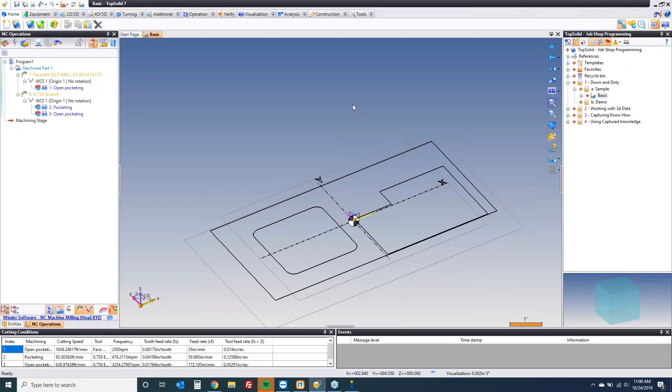If I go into my project here, our first sample here is called Down and Dirty. I'm going to open it up and just show you what I'm talking about. So here I have a couple of basic profiles created. I have a rectangle where I'm machining off the face. I have pocketing operation 1, open pocketing operation 2. Quite simple. What I'm going to do is show you how you get there.

That's the important part. One of the things I really like to do when I'm showing TopSolid is I don't want to hide anything from people during demonstrations. I want to show you click by click how we do it. And then you can be the judge. You can decide whether or not this is more efficient than what you're doing now.

So here's how we're going to start. I'm going to go to my demo folder here for Down and Dirty. I'm going to right click on it and I'm going to choose to make a machining document. When I do that, the software is going to ask me what template do I want to use, and we're going to get into some of these more advanced templates later on in the presentation. But for now, we're going to just work with a basic mill, because again, at the end of the day, the goal of this is fast. It's going to ask me what to name it here, so we're going to call this plate. Why not?

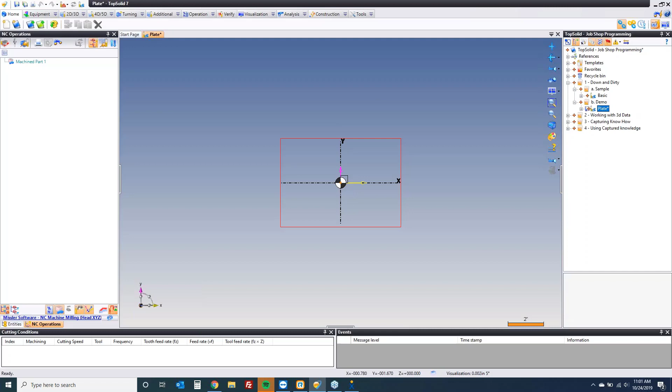So right off the bat, you see a plane, you see some axes that represent the machine axes, and you see where our G54 is. Our G54 is right here in the center. Now we can draw about that, and that'll be fine, or we can draw whatever we need to draw and move our G54 to where we need it to be. Choice is yours. For this sample, I'm just going to draw about my G54, so I'm going to go ahead and go to Cad Mode.

In Cad Mode, I can either right-click and start a sketch, I can go to my 2D Sketch tab up here, hit my pencil to start a sketch, or go directly to the command that I want to use to start the sketch. Again, choice is yours. Here, I know that I want to create, for example, an 8-inch by 4-inch rectangle. Now, if you look at my rectangle, it's following my cursor around the screen based on the center point, which is convenient because I want that centered about 0, 0. Perfect. So I now have the boundary of the plate that I'm machining.

Next, I want to create another sketch. In this case, it's going to be another rectangle, and I want this rectangle to be 2.5 inches by 2.5 inches, again, by the center. And I'm going to pop it right on my x-axis there. This way, we know where its location is up and down. And now I'm going to add a quick dimension from here to here because the guy that I'm building this for said that's a 1/2 inch from my 0.

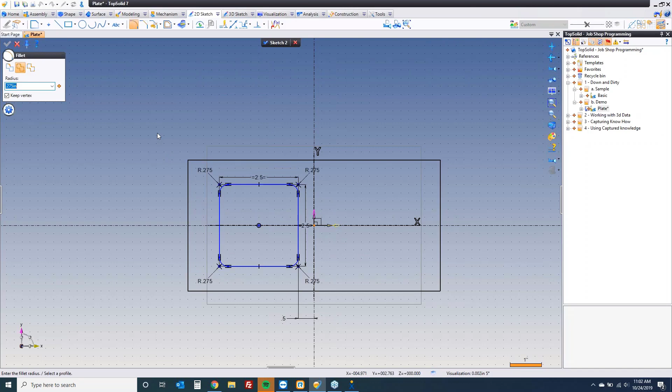Last thing I'm going to do, I'm going to add some quick fillets in here, maybe 275, whatever. You get the idea. I have my geometry. Now, at this point, we have enough. Let's go ahead and start building some toolpath. So now, when I switch back to TopSolid Cam, just to illustrate again, this is just flat 2D dumb geometry.

There's no intelligence here. So, to begin with, I'm going to simply select what I want to machine, right-click and go to End Milling. Or, again, if you're new to the TopSolid interface and you don't like right-click menus, you can go to the 2D, 3D tab and click End Milling right there.

For those of you that don't know, End Milling is a combination of facing, pocketing, and open pocketing. It's all in one command. It works on profiles, it works on solids. You'll see it works pretty much across the board everywhere. It's wonderful. Now here, the software chose for me my face mill. It's the first operation, kind of makes sense, so it's grabbing my face mill.

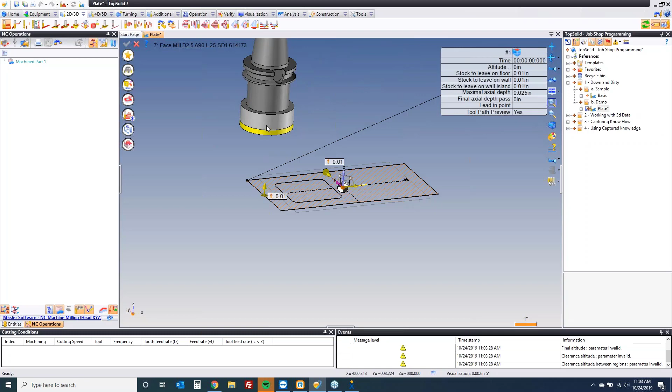Now, what you don't know is the template that I chose, that basic mill. I have my favorite tools already loaded in the carousel, and we'll get to that in a second too. So right off the bat, it found the area to machine, but we have a problem. Notice here there's an asterisk, and if you hover on it, it's telling you the starting altitude has got a problem, the final altitude, the rapid planes, because it's just 2D curves. The software cannot make intelligent decisions here, not with data like this.

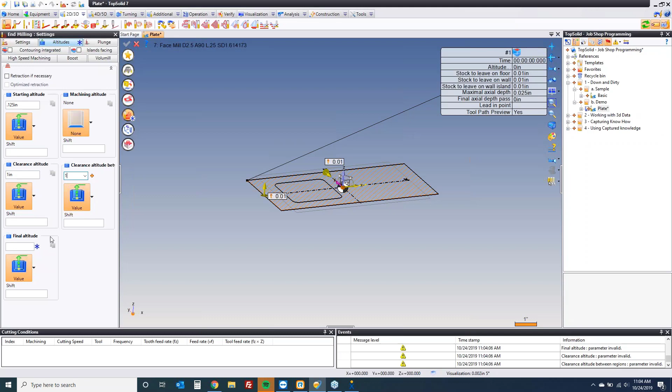So here, if I say my starting altitude is going to be an 1/8 inch above 0, maybe in my mind I know I have an 1/8 inch of material to remove, right? And then if I go down here to my rapid planes, I want a rapid, not at 21 inches, at 1 inch. Clearance altitude between regions is 1 inch, and final altitude is 1 inch.

Now I have toolpath. Now here, because TopSolid really is intended to work off 3D models, I'm also going to go turn off a default command called ZPath stock fitting, which we're going to come back and talk about in a little bit. And now I want to treat this as a facing. Remember I said they're all in there. You can just choose what you want. And now we have our facing.

If you notice, the depth of cut is being calculated based on the starting altitude that we set, and the depth here per pass for this tool is being calculated based on a default value. I'm telling it to take 10% of the effective flute length of my tool. Cool. Green check. I have my first level of toolpath.

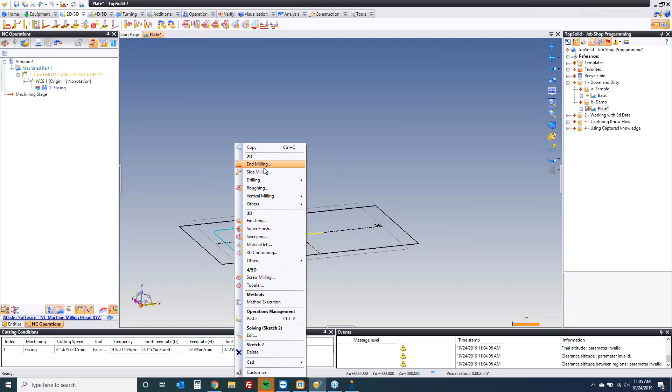Let's keep going. I want to select this profile, go to end milling, but in this case, that tool is too big. So let's start by switching tools. And here's what I was talking about where I said I have some defaults in here. Notice I have a bunch of different types of tools in here. Maybe for this operation, I want to use my 1/2 inch end mill. Cool. Like before, it's still missing the starting altitude, the ending altitude, everything.

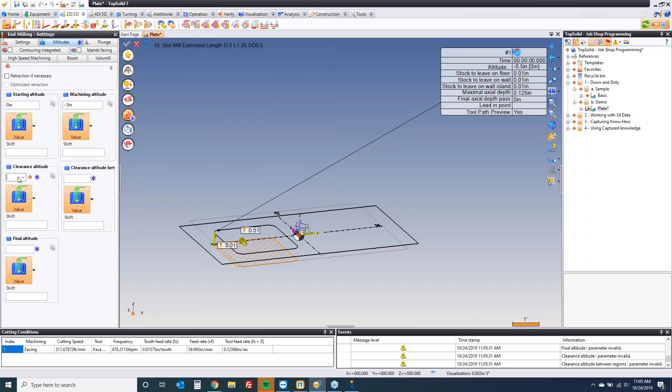So let's go to altitudes and say our starting altitude is 0 because we just machined to there. You're the one having to remember where these altitudes are, by the way, because you're just using dumb curves. And we want to machine to a value of -0.5. Now we don't see any toolpath yet because we still need to tell it the rapid altitudes. We'll go here, and now we have toolpath once more. Perfect.

Now that's all fine and dandy. This is showing you fast ways to work, and I can go into here and I can run verify on this, and the software will throw kind of a make-believe stock model in there so you can see the material removal. That's great. Everything looks like it's supposed to. But can we make it a little bit more intelligent? Well, the answer is yes.

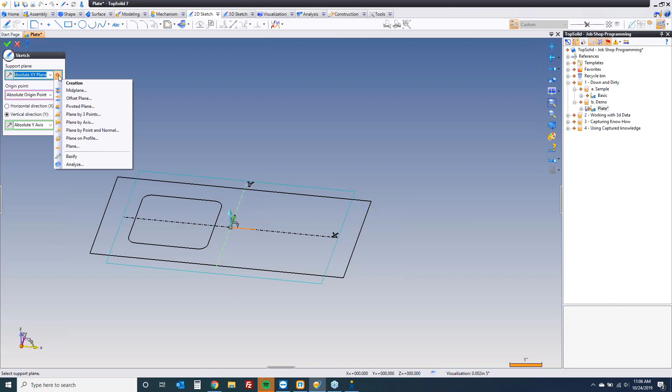Let's say we have one more feature to cut into this quick plate, this job that we're doing for customer XYZ. Well, what you can do, I'm going to start my sketch. Instead of drawing everything at the same altitude or the same plane, I'm going to tell the software, you know what? I'd like to go and offset my starting plane down in Z some value. I want to offset it to the depth this pocket is actually going to go to.

Okay? And then I'm going to make my sketch. We'll look straight at it here. And this one is going to show off how to do an open pocket. Why not?

Okay, so we're going to close that up like so. Let's go ahead and add some quick dimensions. Maybe I want this to be like this. It's going to be a 1/2 inch. And basically the steps I'm taking, I'm going to show you how to do something similar to this directly from a 3D model. That's coming up here in a few minutes.

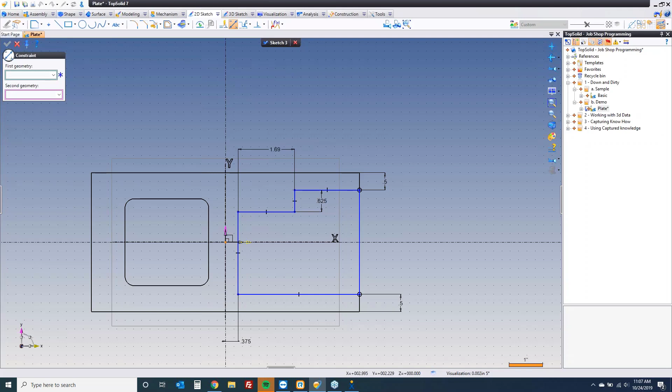So here, let's say that I want this to be 3/8 from my 0. Let's say we want this to be a 5/8. You guys get the idea. I'm just basically giving this the size that my customer told me it needs to be. Great. Maybe I want to add some fillets in here as well. So let's say we want our 275 fillets on all inside corners. And then we want a 30 thousandths edge break on that outside corner. Good enough. So now we have that profile.

We switch back to machining. And when we're in machining now, I'm going to select this. And one thing is going to change, the altitude. Notice it knows that that's where we're machining to now. And it's because we took the time when we made this sketch to be down to that altitude. So now if I go to my settings, again, same concept as before. I want to go to my altitudes. My starting altitude is going to be 0. My rapid planes, I'm going to have them all at 1.

You have different rapid plane choices here. I'm kind of blowing past them, but this is your general clearance altitude. If I was machining both pockets in the same operation, this is the altitude between those when the tool moves back and forth. And then when we're done with this operation, where do I want to retract the tool to? That's what that's all about.

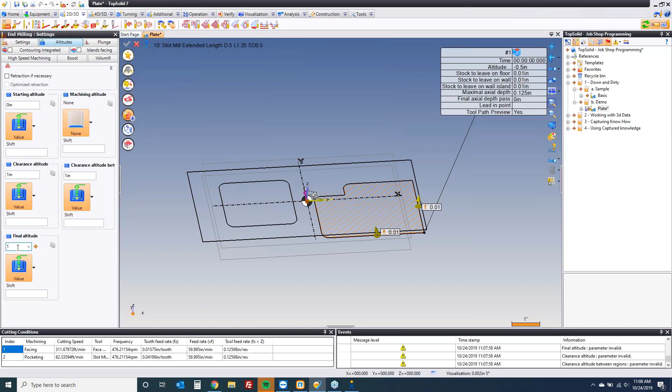Now here, this is treating this as a pocket. And that's because it's a closed boundary, right? There's no solid, there's no stock, there's no nothing. The software doesn't know and cannot make any intelligent decisions for you. And again, I'm going to come back to those intelligent decisions. So here you have to tell the software. So here I'm going to say, you know what, treat that as an open pocket. And our toolpath goes away.

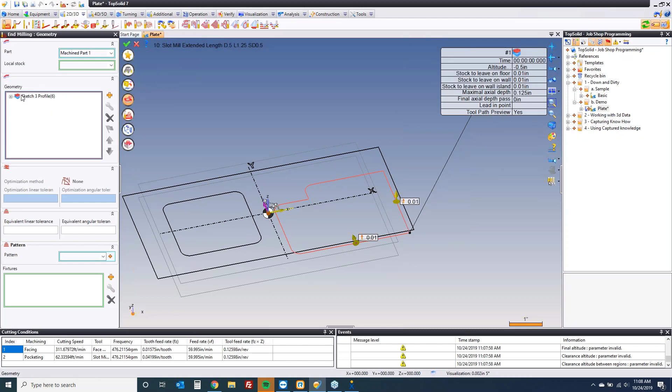Why? Well, it goes away because we have to help TopSolid and tell it where the pocket is open. So we go to geometry, go to our open zone, and we can say, for example, it's open right there. Just select the segment or segments where it's open. And now you can see it extends the toolpath out appropriately. And like that, I've now created the 3 main pocketing operations that I need to make. Okay?

You can say, you know what, I want to run this at 2,500 RPM at 25 inches a minute, or maybe you're a surface foot person. I want this to be 425 surface feet and I want a 5 thou chip load. You can see one updates the other and vice versa. You choose your coolant method that you want, off you go.

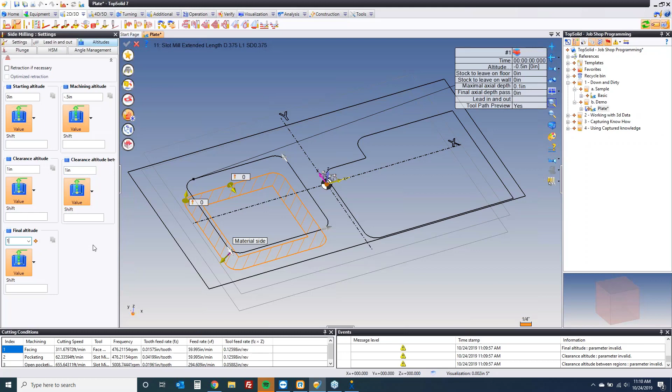Now, just like with end milling on profiles, when there's no solids, no stock, no anything, the software does not know what you want to do. So we have to go to our altitudes. We set our starting altitude. We come here, we set our ending altitude, right? So we go to value and we'd say minus 0.5 from our G54. We set our rapids. Nice. Okay, and now we have our toolpath. And we can choose where we want to start and end the toolpath. You have everything that you need.

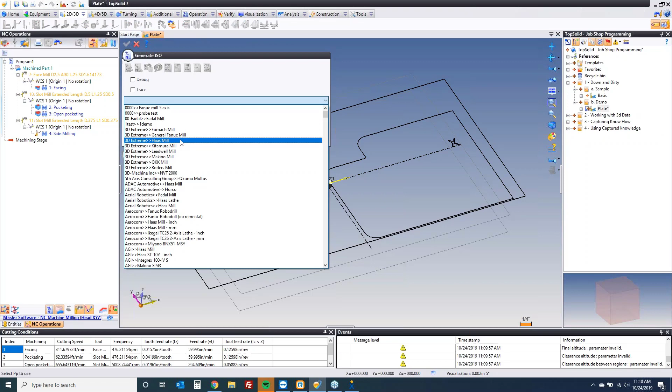Okay, so that is down and dirty programming. And if I go into TopSolid's post processors and I go to generate ISO code, for example, I'm just going to choose a simple little Haas mill. We'll post process. There's your G code. Little tool setup sheet, G code. We're rocking. You're out running in a few minutes. I've spent a whopping 10 minutes programming this. If I wasn't talking and just focused on the job at hand, this is a 2 to 3 minute job. Not a big deal. Maybe 5 minutes.

Okay. Now, where I want to go to next is how, as a job shop, can you program more efficiently? Well, you use modern software. What I just showed you is the fact that TopSolid is capable of programming like all the other CAM solutions.

We can take simple profiles, you can throw a toolpath on it, you can make all the manual decisions you want to make. Or you can use a software that's written to be just a little bit more intelligent out of the box. What do I mean? Well, let's begin working with some 3D models.

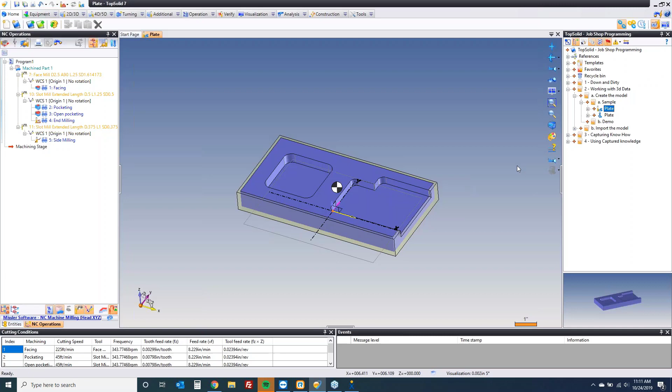For example, if I go to working with 3D data, I have a sample called create the model and a sample called import the model. I'm going to show you both. If I go to the create a model and I go look at the machining side of it, notice that same plate we were just describing, I have it described as a solid model. And I have my toolpath for said solid model. Okay? How? Well, let's take a look.

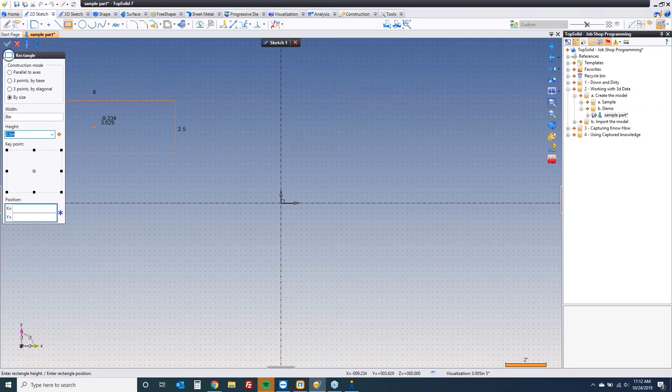I'm going to go into my demo folder and I'm going to create a part first this time. We'll just call this sample part. What you should have noticed before, when I was in machining in my down and dirty sample, I was just going and building a sketch, right? Well, I'm halfway through to the solid model when I'm doing that. So if I go to part mode and I start a sketch, I can go to my rectangle and I can build that same rectangle. I want an 8-inch by 4-inch rectangle right here.

What do I want to do with that rectangle? Well, I can right click, TopSolid will propose the option. I can go to the Shape tab. Only options that you can use are currently lit up, so the interface is always helping you out. So I'm going to extrude this, up, down, doesn't matter, and I'm going to say 875, perfect. Now, on this top face, I'm going to create another sketch. Look straight at it again, just so it's easy to see, and let's go make that 2.5 by 2.5 rectangle.

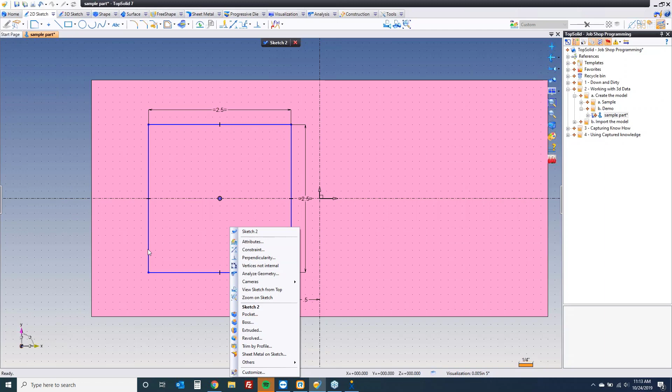Again, I'm taking very, very similar steps to what we did. I'm just adding the modeling steps in between, and maybe this is supposed to be a 1/2 inch. Good enough. And here, I want to cut a pocket. Now notice this time I skipped the fillets. Why? Because when I add my pocket, maybe my pocket is going to go down a 1/2 inch, I can add fillets in the corners automatically. Nice. Let's go add our open pocket.

So I'll go to sketch again, look straight at it. This time I'm just going to sketch it out just like you saw me do before. I'm just adding my segments that I want. I'm always creating my closed sketch. And I'm going to add my dimensions. So I want a dimension from there to there. That's supposed to be a 1/2 inch. I'm going to dimension from here to here. I'm too lazy to type the value in, so I can click here and get from any of my previous values that I've typed in recently.

Nice. If I add my dimension from here to here, maybe I don't want to click on that. Maybe I just want to borrow this value. I can just click it and it fills in the value. No matter how you want to work, you can work. Maybe you need to do some math here and you're too lazy to get out your calculator. I want this to be 0.9375 plus 0.1875. Cool, there's my inch and an eighth. And notice it leaves the equation there, so when you come back later and say, where the heck did I come up with that number?

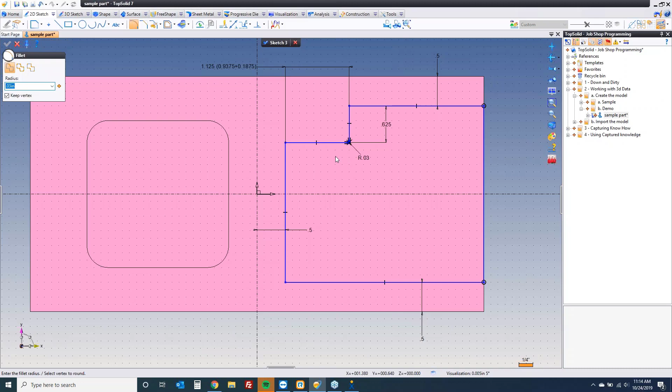There you go. Now I'm going to add my fillets, because here I have inside-outside fillets that are kind of custom. I want my 30 thousandths fillet there, and then I want a 275 on the other corner. So you can select near the corners on the vertex. The choice is yours. This time when I go to pocket, we're going to go to a different altitude, and we're going to turn off that. I'm going to say that's to 3/8, just to be different.

So now we have our 3D geometry, right? And because we have our 3D geometry, now it's time to process said geometry. So let's go here, go to machining. We're going to send this sample part to machining on that basic mill.

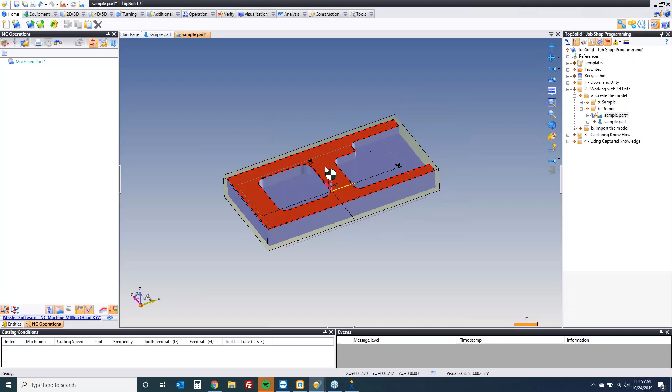And when we do, TopSolid is going to automatically create the stock blank for us. Now my default settings have the stock set to an 1/8 inch per side. Okay, perfect, we'll just go ahead and validate. My G54 is at the top center of finish because that's where I like it. Again, it's a default setting, but now you have a clear understanding of what it is you're going to machine.

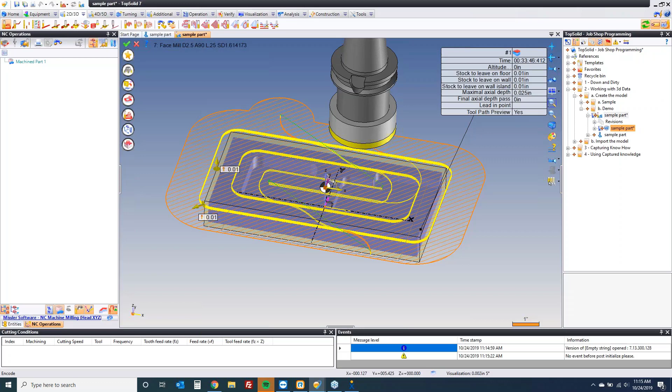So to start with, we want to face this off. Let's select it, go to end milling. Now, if you remember from the 2D side, I had a lot of things to do. But here, because I took the few minutes it took to get the 3D model drawn, TopSolid can automatically determine the starting altitude, the ending altitude, and the type of machining it is. That's a facing. All I need to do is click OK, because it's using my default settings, my company knowledge, with my feeds and speeds, with my depth of cuts, everything. And it's updating that stock condition.

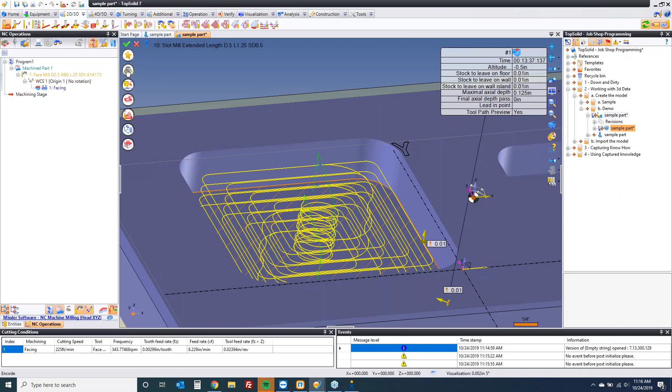Let's go do our pocket. Now if we go to do our pocket with that big tool, it's going to look and say, hey, yeah, that's great, but you know what, I can't really fit that tool in there, can I? It's really trying, but no, tool's too big. No big deal, let's go here and pick a different tool. Maybe here I want to use my 1/2 inch end mill. What's cool is as soon as you change, check it out, it made the toolpath. It set the right starting altitude, the right rapids, it's helically entering, it's doing everything it's supposed to, because when you use the solid models of the finish and the stock, TopSolid can make really intelligent decisions for you.

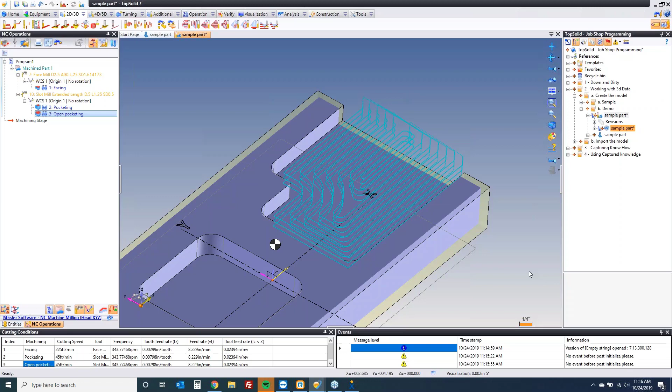Awesome. Now, something else about using intelligence. This toolpath worked really well here. I'll bet you it works the same over here, right? Wouldn't it be cool if you could just control, drag, and drop a copy of that toolpath over to that face? And we thought so too. The only difference is, notice it automatically found that as an open pocket. I didn't have to go and tell it. So I'm processing parts more quickly with my company knowledge being applied dynamically, getting to that finish line faster than ever before.

Now let's go ahead and just do some quick finishings. I'm going to control select the Z altitudes I want to machine, go to end milling. Maybe we want a different tool for this, right? Why not? Let's go to our 3/8 tool. Who knows? So I'm going to use that tool.

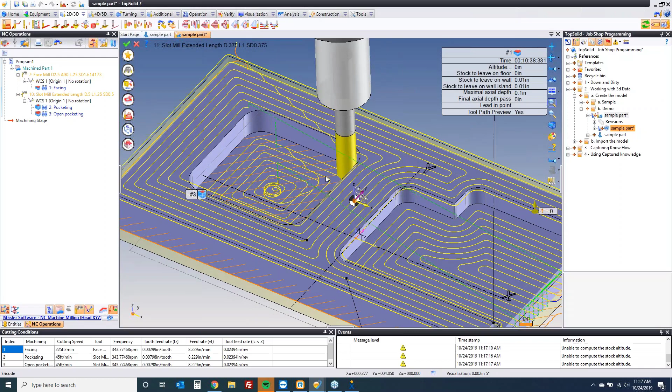Now here you still don't see any toolpath, and that's because there's still stock to leave on the floor. Watch what happens, I'm going to set that to 0. And now the software again is going to make really intelligent decisions. It's machining everywhere there's material. So if you look at that top altitude, notice it's not cutting air above the pockets because it knows where the material is. The other one, in my pocket, notice it's helically entering, but just starting above the material there. We don't need to helical enter from 3 feet above the part like a lot of software does. And over here, because it's an open pocket, just plunging in air, nibbling its way in and out.

Fast, efficient, getting to the finish line faster. And if you get your machines running faster, in theory, you should be making more money because you can process more jobs. And after all, that's why you're in the business you're in.

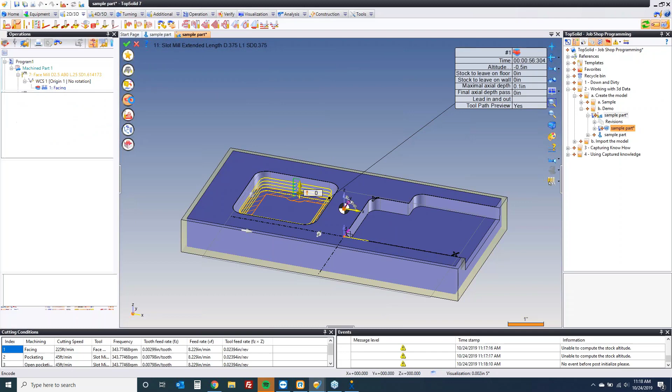Let's finish this by going to side milling. If I go to side milling, here the software is going to do what it needs to do. That's perfect, just to show you in the same operation, you can mix and match. But now here's something interesting: when I go to side milling, it's a finishing operation. It's going to go to the lowest Z of the face selected, and it's going to find everywhere there's material. Notice it's wrapping around the outside of the part, because technically I have material there. But let's say you don't want to machine there because you want to do that with a different op. You can come in here and say, machine the local feature only. So you're always in the driver's seat, even when you want to disagree with the automation that TopSolid is applying.

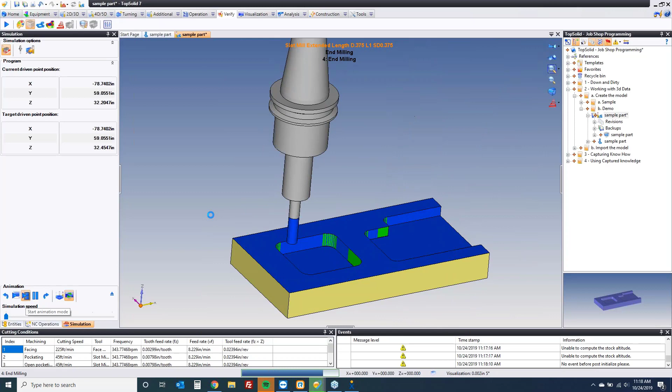Now that's done, that's as far as we need to take this right now. So let's maybe quickly run through verify. I want to make sure that this is good. So you can see it's banging through, and I have it running at a pretty fast mode because, again, short little webinar. Everything is good. I can go here and check for comparison. Green is good, blue is material. Anything that looks like it's bleeding would be a gouge. So that's kind of awesome.

Okay, the last thing I want to do, pardon me, is I need to document my work, right?

Because I got to send this out to the floor and my operator needs to know what's going on, wouldn't it be awesome if you could simply and efficiently create a setup sheet?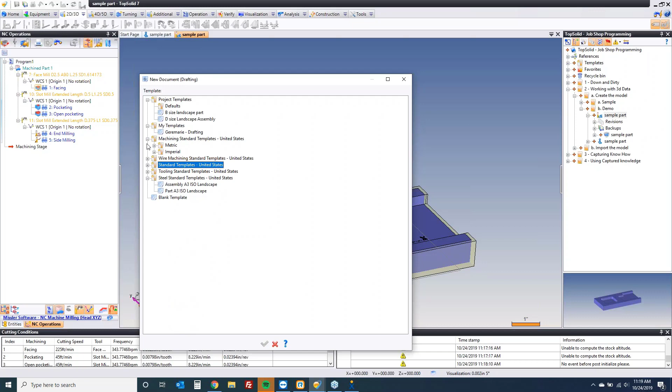And what I'm about to show you is out of the box. I can say operations with drawings. When I do this, check it out.

The software is going to document everything for you: the creation date, the name of the CAM file, the tool number it's in, the diameter of the tool, the shank distance, the feeds and speeds, pictures of everything, where the G54 is located and what its orientation is. And by the way, we did this for every single operation automatically.

What's even cooler about this is it's a TopSolid drafting document, which means if there were critical dimensions that you want your guy on the floor to check, go and add them here. This way he knows, if he sees the dimension on the print, to go and measure those features.

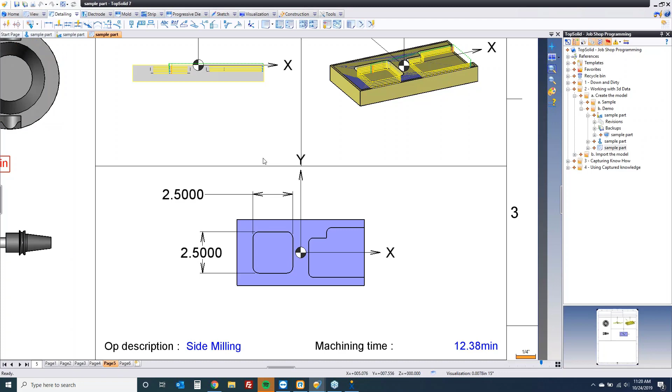Kind of nice. Now let's close that and keep this discussion going, because what we did there is we drew the part, since your customer gave you a PDF file or a hand drawing or something like that.

Now we want to kick it up another level, because sometimes, maybe quite often in your business, customers send you the 3D model, so you can skip the whole design portion of it. So guess what we're going to do? We're going to import a model.

Now, in here, I have a model imported already, kind of looks like that. Just to show you, anywhere you see a preview image in TopSolid, if you middle click, you can go into live preview. So that's the part we're going to look at cutting next.

It's kind of fun. I made two different operations for it because technically you have to machine it from two sides, so we're going to take a look at doing that together.

So I'm going to go to my demo folder, and here we're going to go ahead and start by converting the data. Now, this is just a Parasolid file, but just to show you, I'm going to do the conversion a different way. I'm going to say import file with conversion.

And just to show you quickly what we can read, if I zoom up here, we read everybody, and I truly mean everybody. We can read data from most softwares on the planet, most CAD softwares, let's qualify that, on the planet.

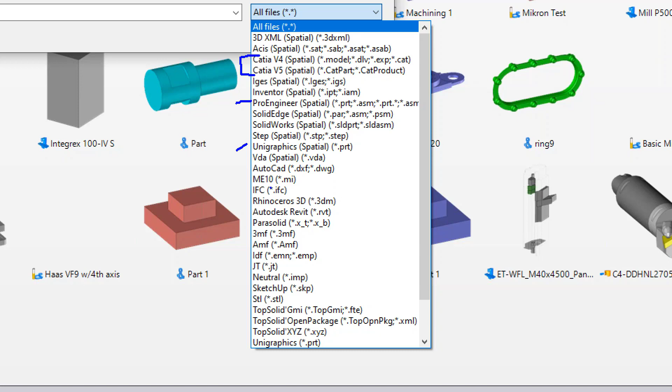Some of these translators are extra, I will tell you that. CATIA, Pro/E, and Unigraphics are add-on translators. I believe everything else is standard in the solution. So we read SolidWorks, Solid Edge, Inventor automatically. We even read Google SketchUp because we can. We read, like I said, a lot.

So what we're going to do is convert this file. I'm going to right-click on that file and choose Convert. And from here, we're going to do a couple things. We're going to go ahead and convert this. The software is going to convert that Parasolid file into a TopSolid design file.

We're going to quickly run through a check on it. This is a healing wizard, and what this does is makes sure that the part imported cleanly with no problems, and everything is perfect, so life is good. And because it's a webinar, and a short one, with just a handful of minutes left, of course everything's perfect.

But we want to process this part, so now we're going to do all the steps. Instead of going straight to machining, I'm going to choose Machine Part Setup. This is an intermediate document that lets me choose how I want the material to be.

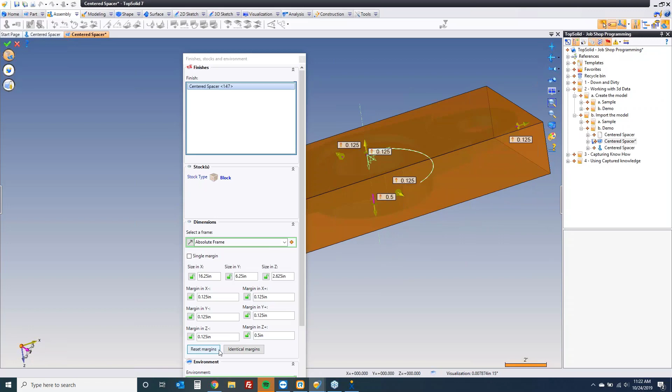Maybe in the first operation, I'm going to hold it upside down like this in a vise, why not? So I'm adding a little bit extra stock down there so I have something to hold onto. From there, I'll leave an eighth inch everywhere else. That's pretty good. And then we'll hit our green check. Our stock is now ready.

Next, I want to send this into a machining file. Now, in the first few samples, I've just been using this basic mill, which is just a generic 3-axis anybody mill. Now I want to put this on my Haas VF6 or on my Kitamura or whatever machine you may have.

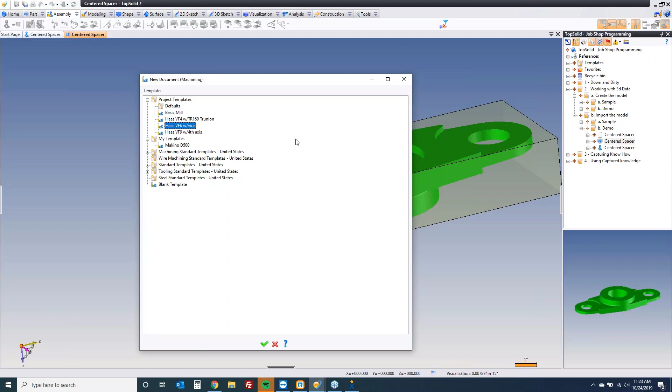So I have a template here called Haas VF6, and I have a vise in there. So watch what happens: when I click OK, it's going to load me into my template.

Okay, it's going to ask me how I want my stock to be. I'm going to choose exact for now. And if you look, I actually have my Haas VF6, and I have my fancy table.

Let's go ahead and look at that one more time, because this is really cool. I'm going to cancel that and look at it one more quick time. I'm going to go here, go to machining, choose my template, and my entire setup is actually already preloaded in the document. That's pretty unbelievable.

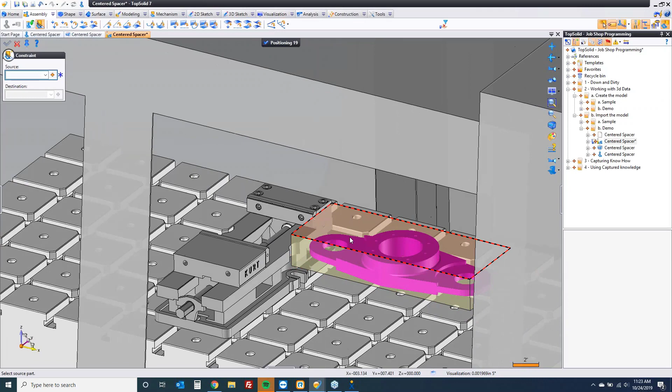Now, what we're going to do next is we're going to load this onto the vise. I'm going to go here and pop that in right there. I'm going to take this face here and lock it to the vise there. Part's pretty big, but that's okay.

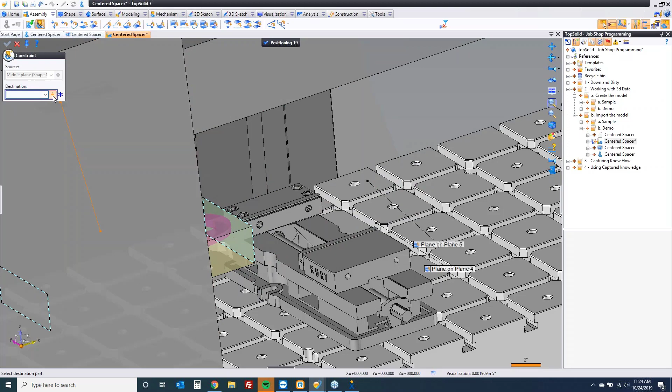We want to center this on the vise maybe. So what I'm going to do here is let's just go to a midplane between this face and this face. And let's pop that to another midplane between here and here roughly. Again, not too worried about it. Maybe we have a bump stop that we hit it up against too, and you're good. Let's put that back, okay?

Now, here, to simplify my view, I'm going to go into the display. I'm going to turn off my ground elements, my enclosure. This way we can see the machine, the vise, everything else, but we're not worried about the enclosure. So everything else in the program environment is the same. The only difference is we have the full machine.

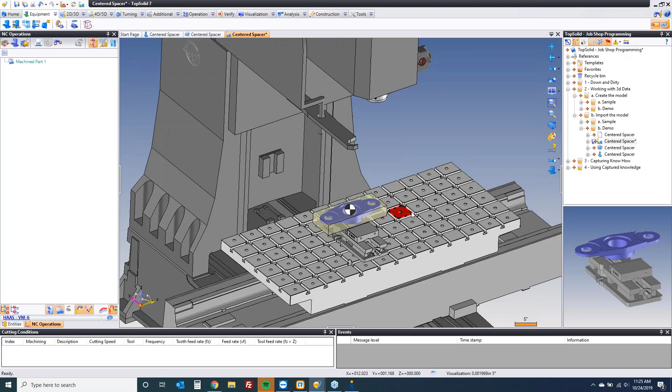And the reason we have the machine, just briefly, is this way we know the kinematic capability of the machine. It can travel so far in Y, it can travel so far in X, and if we over travel that or run into something, the software is going to yell at us. Because it's better to know that we caused a collision here or an over travel here than spend a lot of time programming the part, loading it on the machine, only to find out, well damn, I guess that doesn't work, and we have to start over.

So let's get started. So we have the part loaded. I want to machine. Just like you saw before, I can go to end milling, select my face. It's going to grab my face mill first because it makes sense, because it's going to be facing. Okay, but you know what?

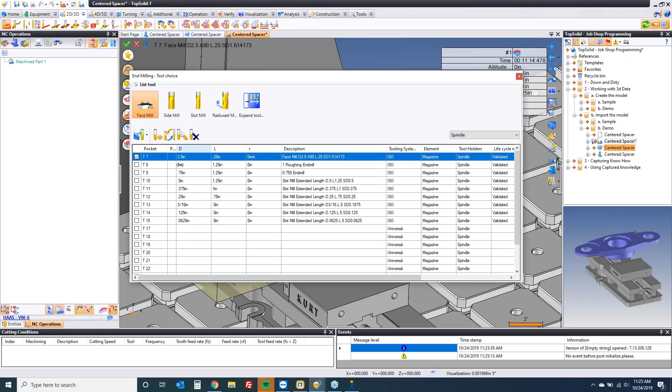I can change my mind. I can come into here and say, you know what, I don't like that. I just want my 1-inch roughing end mill. I like that better. Maybe the reason I like that better is because, you know what, I don't even want that face. Maybe I want to start lower. So I'm going to go here and start at this face.

But what you're seeing is in real time, I can select things and see how it affects it. Now here, that's technically an open pocket feature, so the software is seeing that as an open pocket feature. I'm going to say, you know what, let's go ahead and treat that as a facing. And now notice it's grabbing everything, including that top altitude, because it sees that as an island.

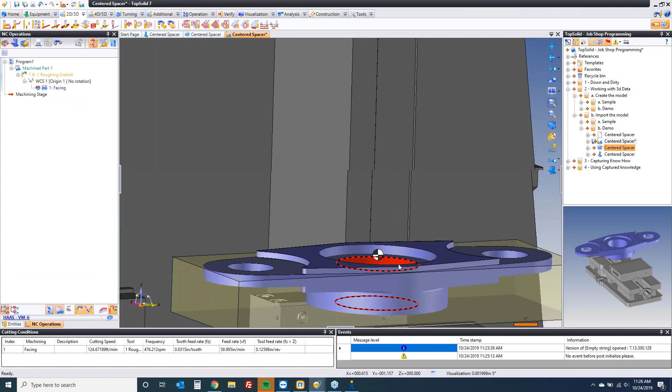Awesome, so now I've roughed down to that level. Next, I want to continue roughing, and I want to rough down below this level. But to make things simpler, I'm going to hide that, and I'm going to switch to CAD mode, because here I need to manufacture something that's kind of sort of near net shape, but needs a little help. So now I'm going to use a mixture of curves as well as solids.

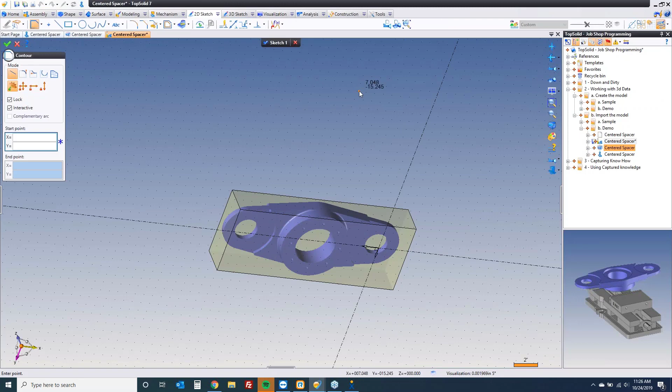So I have made a sketch on that bottom face. I'm going to go make a rectangle, and this one is going to be super duper accurate. And by super duper accurate, I mean I'm just going to draw a little rectangle, because I'm just defining the area I want to machine to. Now watch what happens, and we'll turn the machine back on so everyone doesn't get lost.

I'm going to go here, copy this same toolpath and paste it. This time, instead of drag and drop, I just did Control-C, Control-V. And the reason I did that is because I want to make a change. I don't want to machine there, I want to machine to this profile. And now what's going to happen is it's going to calculate everywhere that needs to be machined inside that profile.

And I'm done. But what you're noticing is that I am going back and forth between solids-based, curve-based.

I'm using machine simulation. Oh, speaking of machine simulation, let's actually simulate what just happened. Let's actually turn the spindle on even so it's spinning, because it's more fun when the tool spins, right? We can go ahead and do that. And you can check for collisions. You can check for everything. Everything is in real time as much as possible in TopSolid.

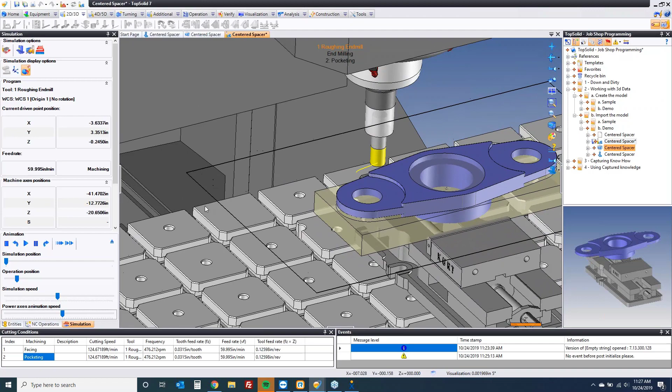Whereas in competitive products that may or may not have machine simulation, it's an afterthought. Sometimes it's an extra module you have to purchase. It's kind of hard to set up and configure. In TopSolid, it's a click. That's all you need. So if it's a click, you're likely to use it. Let's keep on machining. Again, to simplify, I can turn the machine off.

What about machining here, and here, and here? You know what I'd like to do? I would like to machine some plunge holes. So I'm going to come in here. Notice I control selected geometry this time. They're all different diameters. I'm going to say, you know what? I don't really care. I have a 1/2-inch drill in my carousel by default. Good enough for me. And I'm going to drill that. And they're all going from different starting altitudes to different depths even, because I just want to drill them.

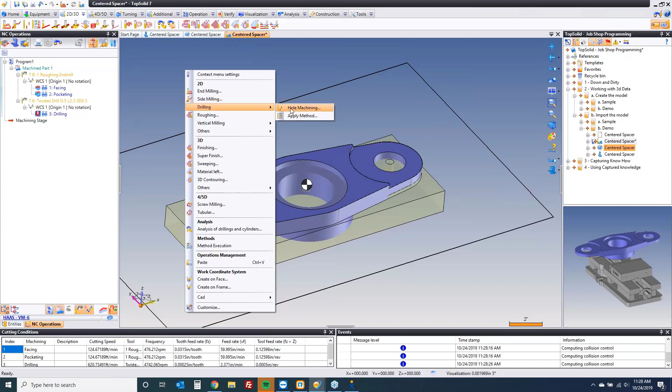Why do I want to drill them? Because now I can mill them using hole machining. Now, hole machining doesn't necessarily mean drilling, tapping, reaming, boring. Hole machining can also mean end milling or side milling. For example, I'm going to go to pocketing inside of hole machining, and I'm going to go pick an end mill. Let's go grab a 1/2-inch tool or a 3/8 tool. It's probably better because this way we're not rubbing on that pre-drilled hole.

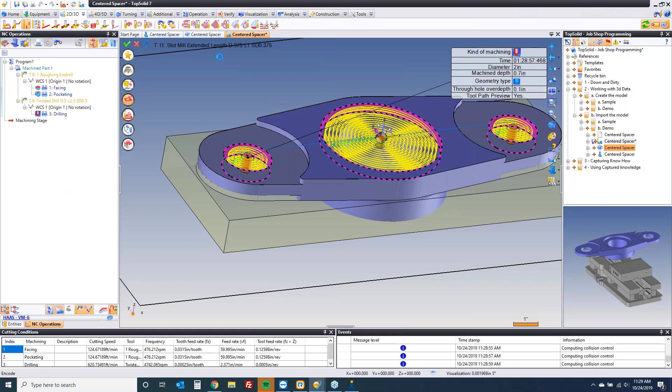And now I'm going to pick my geometries. Check it out. I'm going to go here, I'm going to go there, and I'm going to go there. All of them at different altitudes, all of them automatically plunging at that pre-drilled location and nibbling outwards. And of course, you have full control over depth of cut, XY step over, stock to leave, everything. But what you didn't have to do is remember where all these start altitudes were. You could just process the part the way you're thinking naturally to process the part.

Another fun point, this was a blind depth pocket, right? These were through holes. Notice this operation went beyond, because it's a through hole, automatically. I didn't have to tell it to. Pretty awesome. Let's finish this stuff up and then we can flip this part over to Op 2. So if I go here, again, I'm going to machine these just like I did before. I'm going to go here. I'll go to end milling.

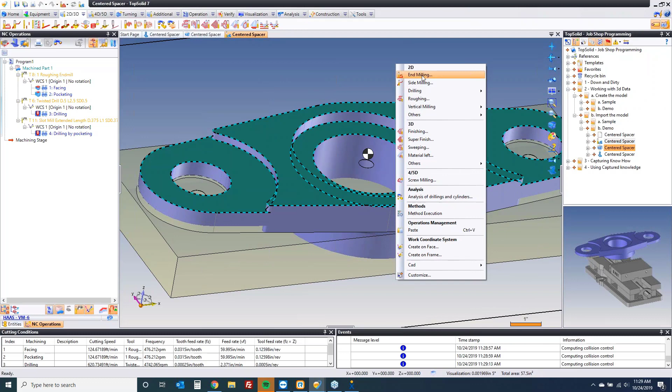We're going to go ahead and maybe I'm going to change my tool now. For my finisher, I want to use my 1/2" end mill to finish the floors. I want to stay maybe 30 thousandths off the walls and go to 0. Cool. Done. Tool path finished. Let's turn that off. So if we zoom way up, you can see the stock to leave here. There's stock to leave on the walls. So let's process those as well.

So I'm going to start here and I'm going to go to side milling. Maybe for this one, it's a really, really rough material and you don't want to bury the tool and just walk into it in one step, and you don't want to pick up in rapid between Z levels. You just want to stay in a constant cut motion. So what we could do is this. I'm going to come into my full settings for the first time in this demo, really, make a change. And I'm going to say I want a 30 thousandths depth of cut. You'll understand in a sec.

If I do that, you're going to see the preview here pop up. So we're taking a shallow depth of cut because, again, accuracy, whatever. But instead of picking up and rapiding, I'm going to activate helical mode. And what you just saw is the software just switched to a constant helix. This way the tool stays engaged and just spins down the part. Kind of awesome.

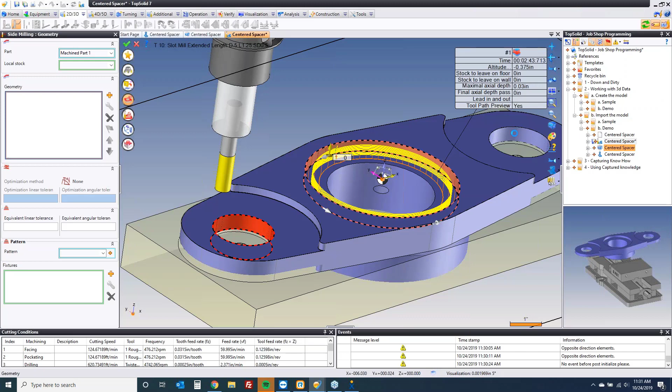I could mix and match that. I can say, you know what? I want to do the same thing over here. And I want to do the same thing over here. Or maybe you wanted to use a boring bar on that. I mean, the choice is really yours. Okay, and then you have your preview there.

Now we're nearly done with setup 1, and I'm going to show you how we flip this to deal with Op 2. And we're about half an hour into this, probably going to use about 10 more minutes here, so thank you for your patience.

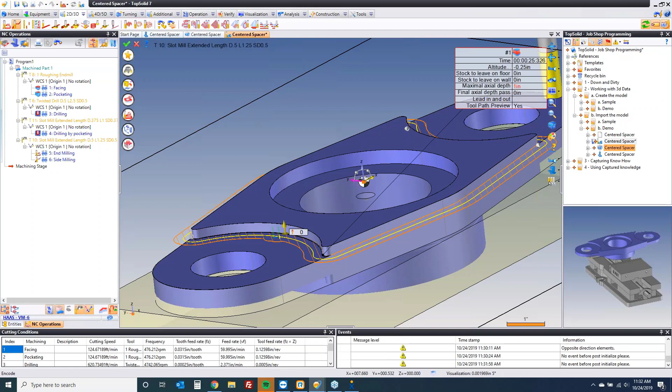Here we go. So what I want to do, I have a choice. Do I want to machine this face all the way around, or do I want to machine this face by itself, this altitude by itself, and then machine this final profile by itself? Well, let's show you what I mean. If I go here to side milling, okay? I'm going to set this to 1 pass because that's all I need. By default, again, you see how it's going all the way around the model.

I could say, you know what? Let's look at the local feature and see what it does. It trims it up just to that local feature. And I can do the same thing over here. That's going to go around. So we have to go to its balloon, local feature. Perfect. And then I could select this face here and check it out. That's going to go all the way around the part perfectly.

Now I'm doing 1" depth of cuts. I could do 1/2" depth of cuts. You could do whatever you want, control it however you want. But at the end of the day, we have now finished our part without thinking hard. The last thing I want to do, customer says I need to break all the edges, so let's do that. And this is so much simpler because it's a solid model.

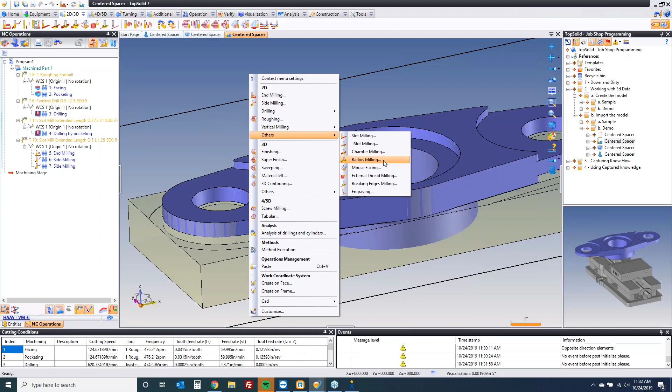Yes, I have a chamfer command, but notice there's no chamfers on the part, so I'm going to go to break edges milling instead. Here I grabbed a spot drill. It could be a chamfer mill, it could be whatever. I'm just going to have it find every edge that's machinable. There they all are, and I'll just say go. Now, what's really awesome here, the chamfers were put on uniformly everywhere, except where they might collide. So if you look, this chamfer stops here long before the tool ran into this wall.

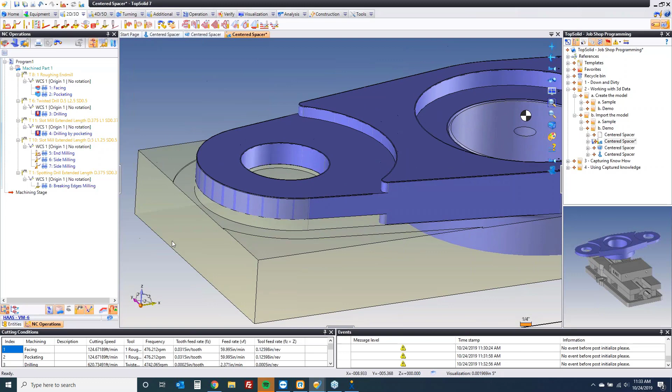And if we go and verify just the chamfer, yes, you can verify just one object in TopSolid. That's pretty awesome. And verify can be with material removal, with machine simulation. There you go. We're going to wrap it around, do that one. I'm going to pause this when we get down to the next altitude, and we have to stop the tool appropriately. Okay, let's come around. I'm going to stop this, and I'm going to slow this way down. We'll zoom up.

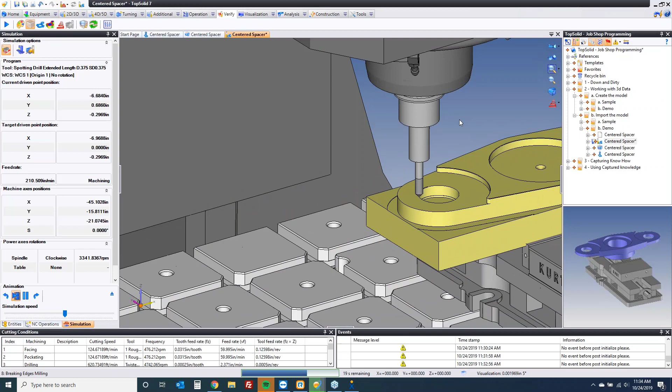It's coming, and it stopped. Notice it's already picked up. It's already off the part here. I didn't have to tell it to do any of that. I didn't have to figure out any of that. The software can make intelligent decisions for you because frankly, that's what software is supposed to do, especially in today's world.

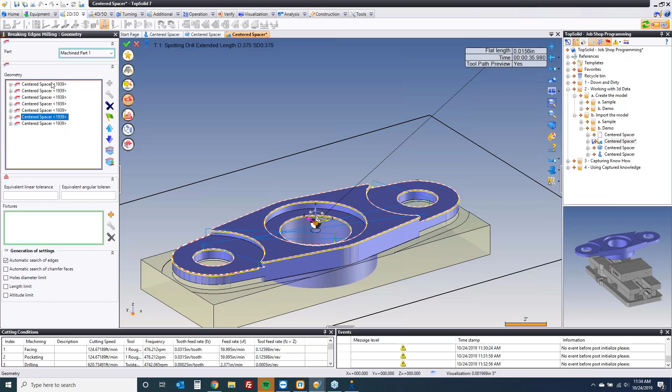Okay, there I made a mistake, right? So that would have snapped our tool, but now we know, so we can go back and edit. Now I could go into my geometry and find which is the right one. It's that one right there. I could delete it. Or I could set a limit down here and say any circle with the hole diameter that is whatever, don't do. It's up to you. But now I've resolved that problem, and off we go. Now we're done with Op 10.

Okay, I'm going to come over here to my file manager. I'm going to call this Op 10 because that's what it is. And now I want to reposition this into another machining document because I have two machines that I'm running this on. One machine is running Op 10, the other machine is running Op 20. So I'm going to send it back into a VM-6 with vise, but maybe I won't use the vise this time.

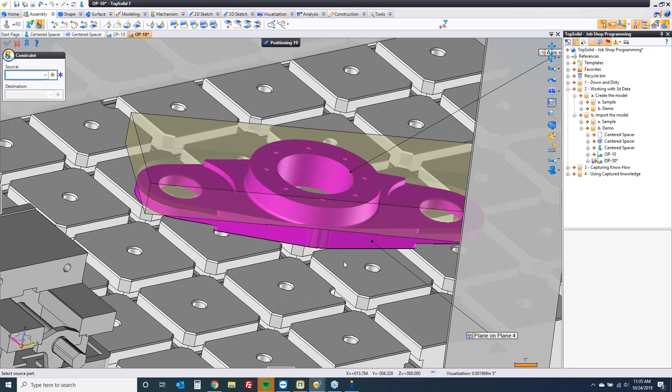Okay, so I'm going to go here. What I want you to pay attention to when I reposition is this. Let me pull it off to the side here. What do you notice? The updated stock model came with, didn't it? So maybe I know I have a fixture plate that's on here. I'm not worried about colliding with it, so I'm just going to position some things like so. And let's go ahead and align this with this. That squares it up to the table.

Sure. Whoops. See, even demo guys make mistakes. Let's try that one more time. With that, there you go. Validate our positioning, and off we go.

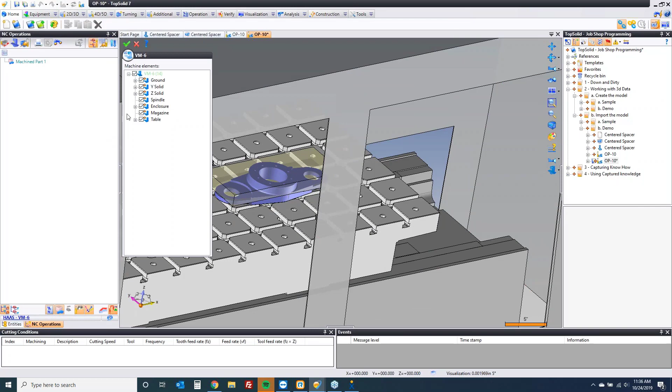I can go ahead and go to my display, and I can hide that enclosure again. I can go hide the vise. It doesn't really matter. Okay? We can go to our entities here, and we can go find the vise. There's that, there's that. Boom and boom. Anyway, everybody gets the idea. Oh, there it is. Where is it? That's the main assembly. That's what I'm looking for. Okay, so set down a fixture plate. Now we want to continue machining.

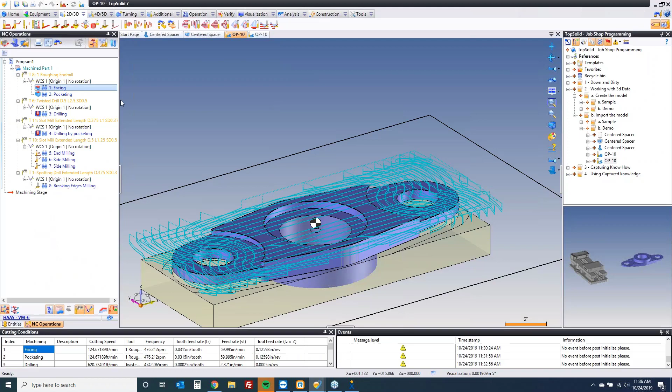Now, one of the things that's kind of cool about TopSolid is the ability to reuse things. For example, I can go back to Op 10 and I can say, you know what? In Op 10, that first facing I did, that was really cool. That worked really well. You know what I want to do? I want to copy that. And I'm going to come over here to my next file, which I should be labeling Op 20, excuse me. Let's fix that. Everything's always editable. And I can come in here and I can do paste.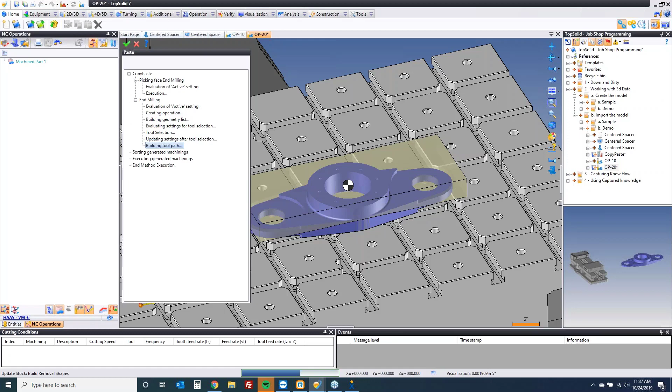And then the software is saying, do you also want to copy the cutting conditions? Sure, why not? And now it's showing me the part. I can rotate, pan, and zoom with it. I can look at it. Okay, I want to machine down to that altitude and hit go. And now it's copying every change, every setting, everything over to this new geometry, new file even, and it's applying it. Let's rebuild. And like that, facing is done.

Now, something cool about that, besides the fact of how simple it was. Notice how TopSolid is paying attention to the part. I'm using a regular square end mill. There's a fillet down here. TopSolid recognized that fillet, and instead of blowing it away, it stepped out and around it appropriately. You didn't have to tell it to do this. Huge difference between us and most platforms on the market today.

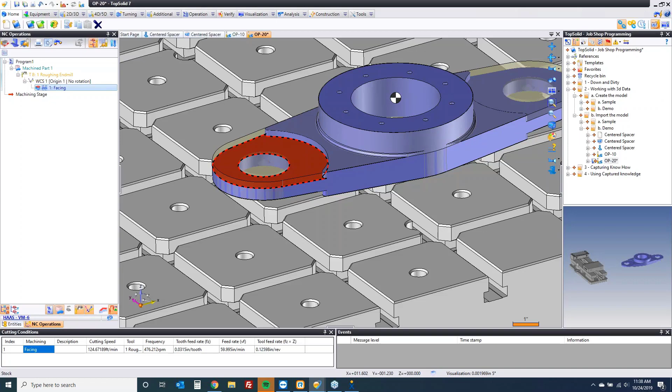Again, we can use that same drag and drop technology. Let's go here. That's going to machine down that altitude next. If I go and modify that one, because truthfully I can probably do the other one at the same time, let's go there. But again, the thing I want you guys to take away from today is how quickly and efficiently we are programming parts in TopSolid. No matter if it's a down and dirty project, something you just got to bang out quick, hey, profile this, cut this, move on with life, all the way through processing something in a pre-production to production style toolpath.

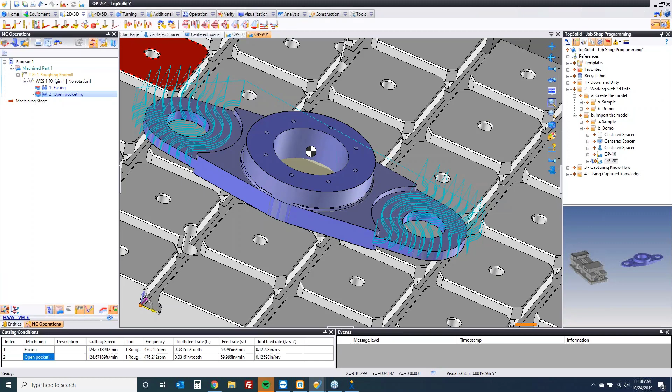It's done quickly. Now, let's say we have no idea how big that radius is, but we want to machine that. Okay, let's go ask TopSolid. I'm going to go in here to Analyze, go to Measure, and let's go select the face. It's going to come up and tell me what it is. It's an 1/8 inch radius. Cool. So let's machine it. Here's what I'm going to do. I'm going to go to end milling on here.

And I'm going to go build a new tool because all my tools right now are just regular end mills. Thus far, I've not shown you how to build or create or load new tools. So in this sample, I'm going to build a new tool. It's going to be a radius mill. If we look, here's a preview and you can see the radius on it. I'm going to say this radius needs to be an 1/8 inch. Maybe the diameter is going to be 5/8. Let's have a look at that.

Yeah, that looks nice. Maybe it's got an inch of flute. Is that enough flute? No, we should probably go with the 1.25 inches just so we get better finish. Perfect. Overall length of this tool is 3.5. You get the idea. If I come into here, I can say, you know what, this is a special 5 flute cutter. It's good for cutting widgets. I can go to my tool assembly.

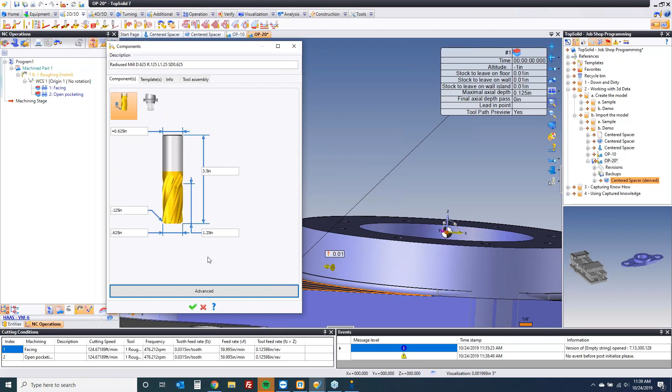I can play with my gauge distance of my tool. I can have it short and stubby. I can have it sticking out a mile so we get good tool flex. You can do whatever you want. I'm going to say let's make this 1 3/8 just so it's a good round number. That's as good a starting point as any. So now we have this tool. That's fine. I'm going to set my stock to leave on the floor to 0.

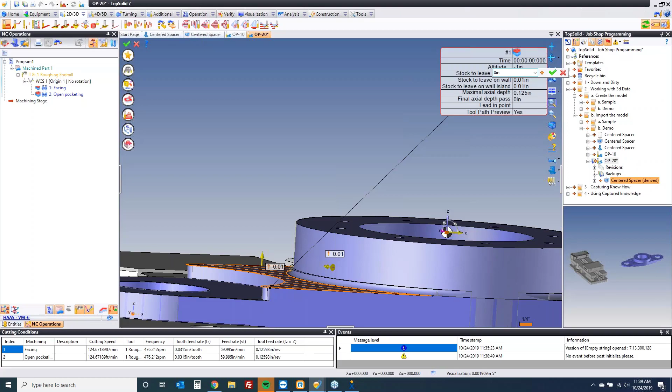Okay? And what you're going to see is it's going to machine everything the way it's supposed to machine everything. And it's going to get that tool as close as it can, leaving 10 thousandths on the wall because that's what it's set to. Notice it's paying attention that the tool can fit now. That's awesome. Now, maybe you don't want to rub the side of this tool on the wall, on the rough wall.

So let's go here. Let's make that 20 thousandths. So that's going to step out a little bit. And let's set this to be a facing. This way we machine both sides right away. One last thing. If you're really set in a production environment, rapiding up to this altitude for everything, that's a waste of time. Let's go into settings and make a change.

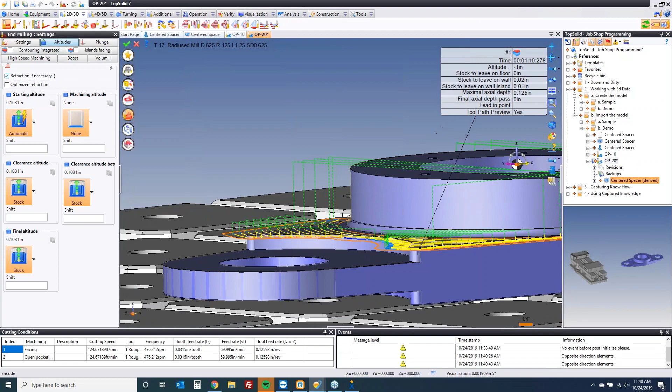If I go to my altitudes, I can do retract if necessary. And what just happened? The software is retracting as high as it needs to, only if a collision is detected. Pretty smart. Again, able to use the 3D environments in real time. That's really cool.

Now, let's do side milling a bit differently. So if I go to side milling, right? If I pick on this face here, notice this face goes all the way down to there. So it's really going to machine down at that altitude. I want to machine at this altitude. So I could choose this edge. That is a local edge. I want to machine on this side.

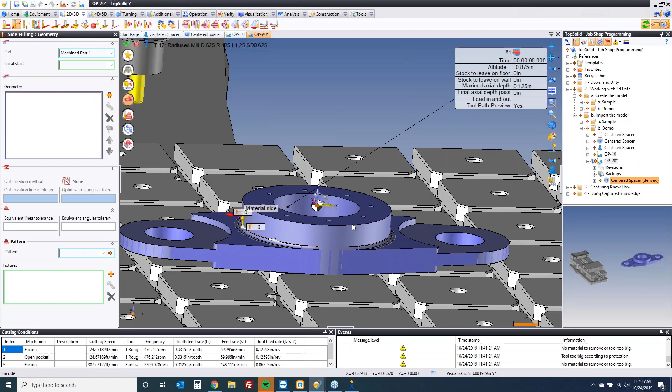Pretty cool. If I choose the edge though, I have to compensate for the radius. Okay? Not the end of the world, but I also want to go all the way around the part. So instead of using that edge, I'm going to use this edge. Again, material side when you're choosing edges is important. And then altitudes. So I can go to here and I can say for my machining altitude, I'm not machining to where that edge is. I'm machining down to where this edge is. And done.

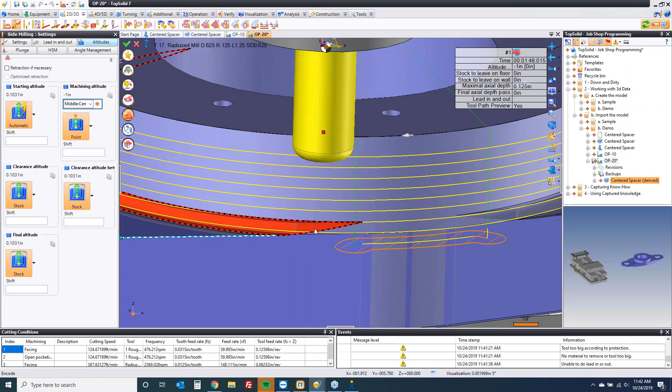Now, something interesting. If I look at this, you notice how this tool path is trimmed up over here. It's because this fillet, the way it comes out, you know, sometimes when models get trimmed and everything, the fillets kind of take a beating. So the software is confused. It thinks it doesn't fit there. So to be safe, it's pulling out long before.

Okay? But you can come back into here and say, you know what? Don't check the finished part. I know it's okay, and I have a tolerance on my fillet, so go ahead and put that tool path in down there. Finally, notice my lead in lead outs.

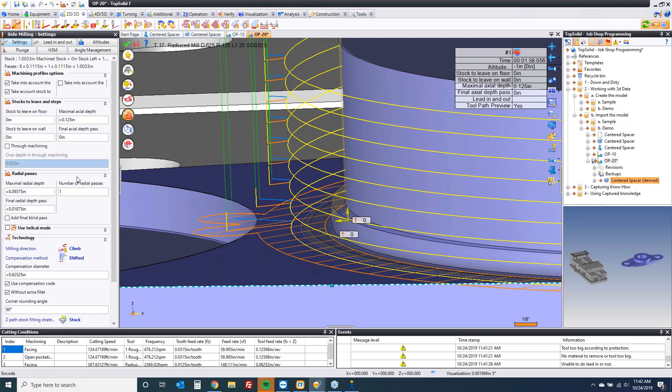Per altitude, they're nice and tight, nice and close. When we get down to here, notice it extended the lead in lead out so that your plunge is actually off the part. And it's off the part by the cutting area of the tool. The radius isn't cutting there. Again, TopSolid pays attention to everything. Click OK. Tool path done. So hopefully you guys are getting the idea of what you can do here.

Now, the last thing I want to talk about, we'll end this in just a few minutes. If you have questions, maybe start thinking of them, typing them into the questions bar, is how can we further reuse machining strategies? Well, I can take this facing, for example, because we really like that facing, and I can come up here to my favorites. And I can enter this and say simple facing and hit save.

And here it's going to say, do you want to save it with the tool? I'm going to say, sure, I like it with that tool. With the cutting conditions? Absolutely. Only for the current machine? Nah, all machines. And now I have something called simple facing.

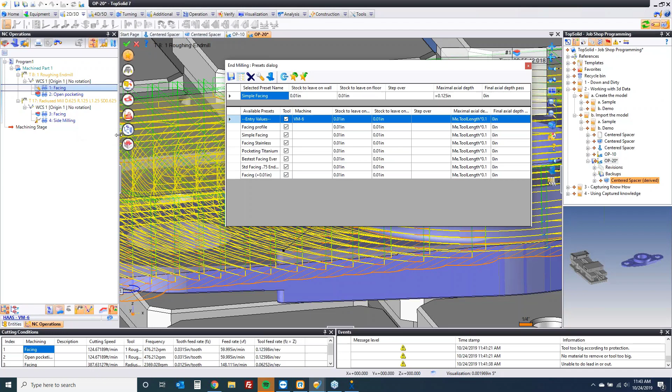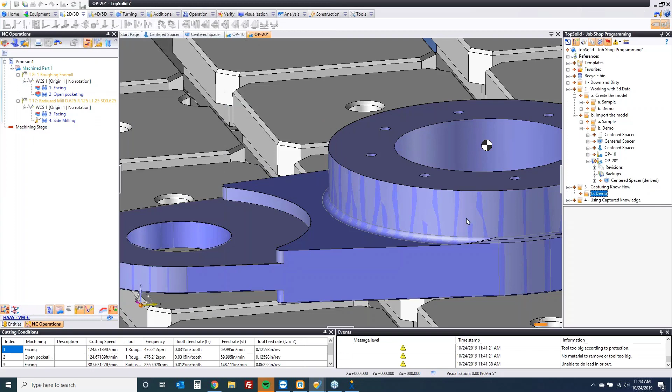And the way that will work, just to show you, let's go into another project here and let's import another file really quick. We're going to go import file with conversion. And let's do just basic part. Why not? Let's send the basic part, looks like that, into machining. It can be a completely different machine.

Doesn't even matter. Okay. This is going to be on a Haas with a 5-axis trunnion. Let's pop it right there, and just for sake of time, let's say that's good enough. And this is on the table. And now I want to go here, and I want to go to end milling. I can go here and choose my simple facing, which now applied those exact settings, that tool and everything to the part. And like that, I'm programming very, very efficiently and very, very quickly.

So that pretty much brings us to a wrap on this webinar for job shop style programming. Hopefully everyone in attendance was able to get something out of this.